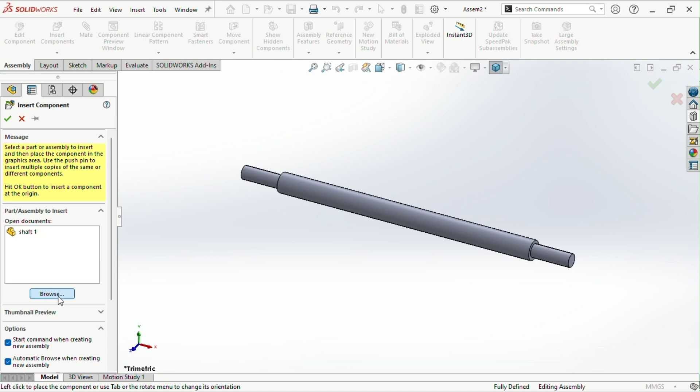Now we will add the tube, which is also known as the roller sleeve. So open it and place it.

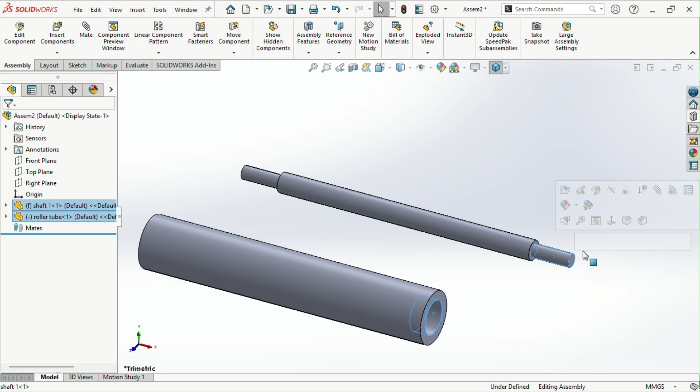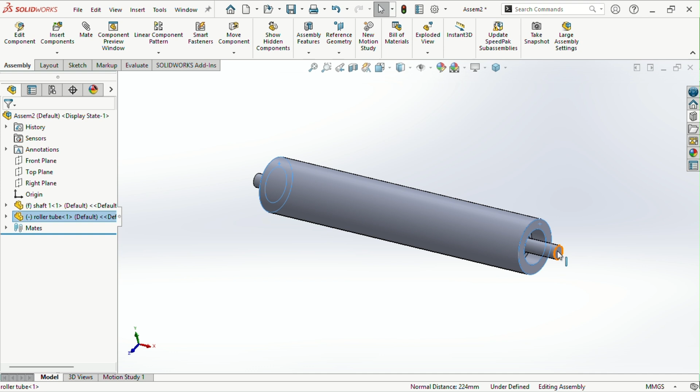Now we will add some constraints and mates. Give concentric. Now this sleeve is moving, so we have to place another mate to assure that our sleeve is at the center of the shaft. We will select both faces of the sleeve and both faces of the shaft, using the control key to select. Here we can see the width mate appear, so click on it and click OK.

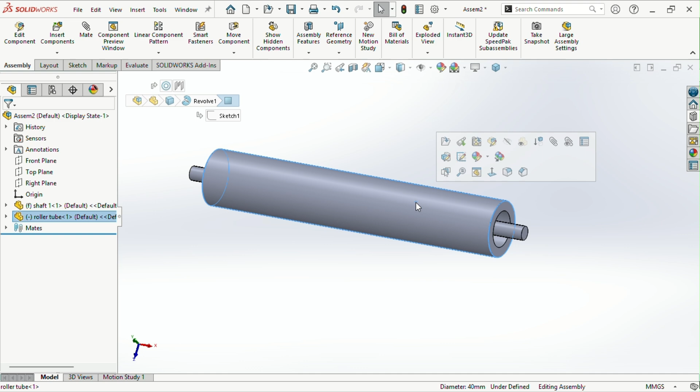Now we can see our sleeve and shaft are constrained. I think we should use some color so that we can easily identify the sleeve and the shaft.

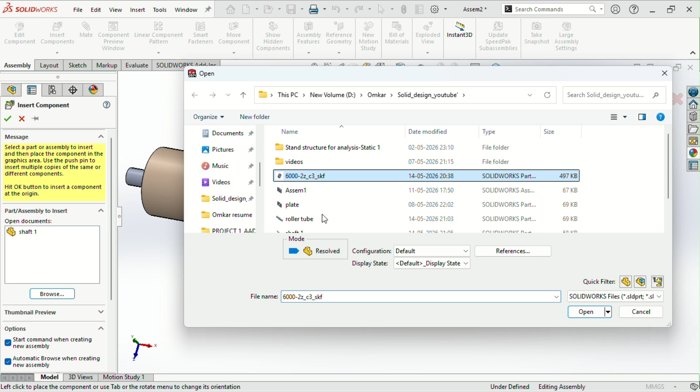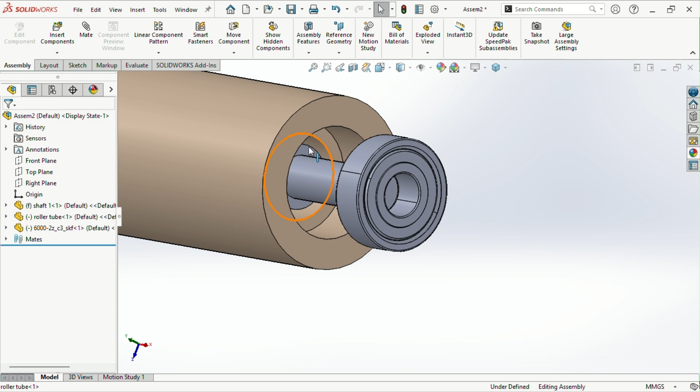Now I have already downloaded the SKF bearing, the 6000-2Z. We will add concentric and coincident mates.

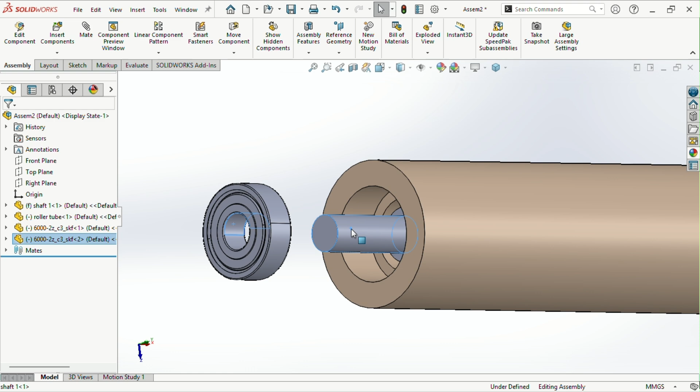For the other side also, copy the bearing using the control key. Just drag it and you can see we have a copy. Take concentric and coincident mates for it as well.

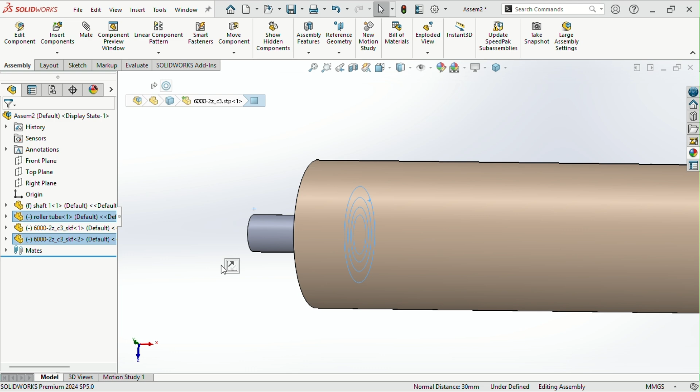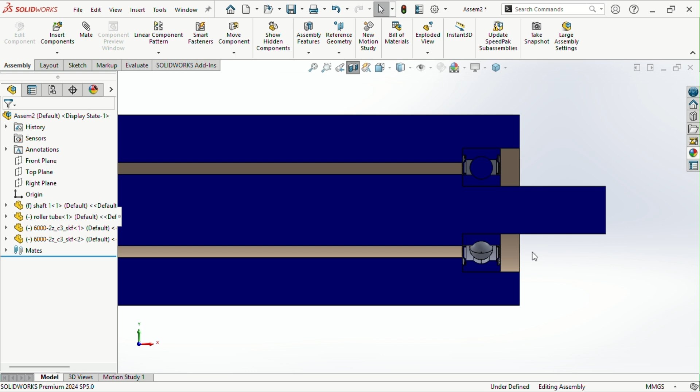Now we will take a section view so it will be easier to understand. We can see over here, this is our bearing, and the inner race of the bearing is resting on the shaft. The outer race of the bearing is resting on the sleeve side.

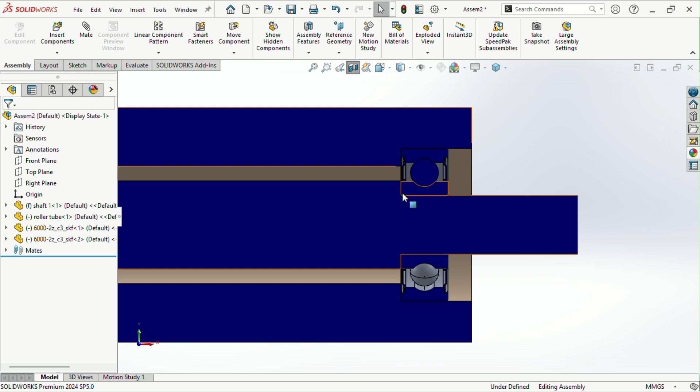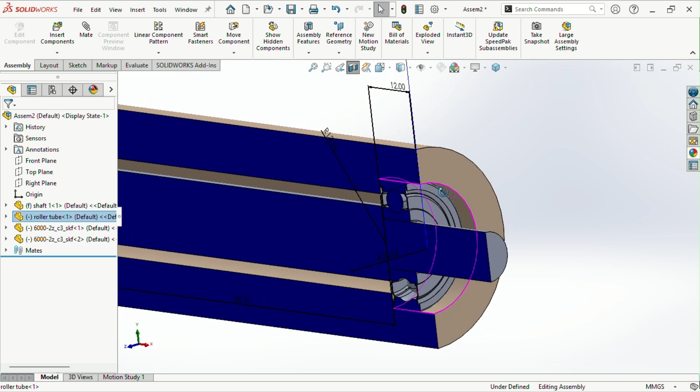I will just let you know I have changed the dimensions of the inner diameter of the roller tube and the step we created, as per the dimensions of this bearing's inner race, outer diameter of the bearing race, and outer diameter of this outer race. We can change the dimensions just by double clicking on it.

So keep in mind that we can change the dimensions directly from the assembly level. That's why I told you in the previous video we can have any dimensions if we don't know the exact ones. After assembling, you will come to know that a dimension is not appropriate, so we can change it.

Now I will tell you how I selected the bearing. This is the SKF website. Here we can go to the home page, Products, Rolling Bearings, Ball Bearings, Deep Groove Bearings, and here we can have the selection from the filter. We can have the bearing, I think, yeah, this is the filter.

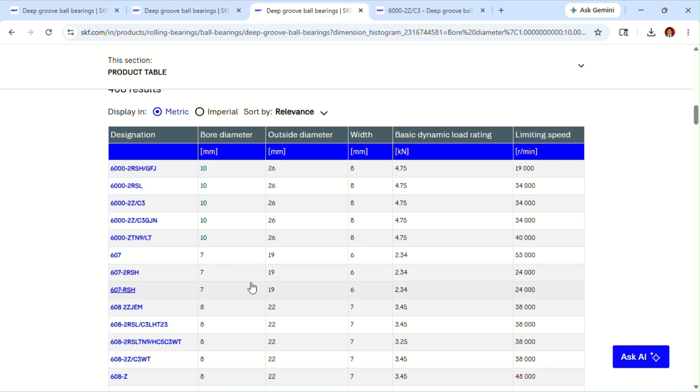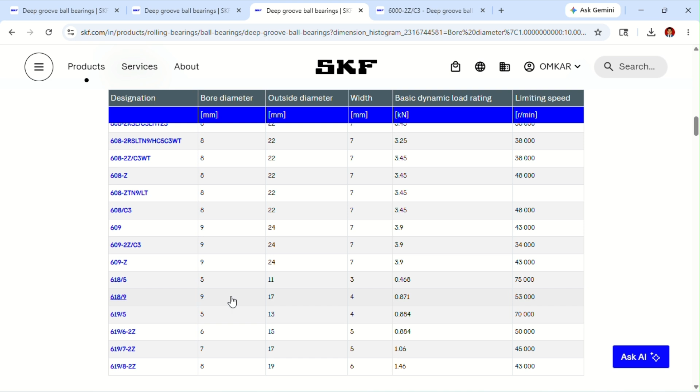I have just placed the 10 bore diameter which is required, and we have all the bearings with that. We have only 5 bearings with bore diameter 10, because we selected 1 to 10, that's why it's showing 7, 8, 6, 5, 9, and 10. So we have to select 10. I have selected the 6000-2Z/C3.

Here we can have the outer diameter at 26 and width is 8, and the basic dynamic load rating is 4.75 kilonewtons, so it's a good load rating. In the upcoming videos, we will have the calculation part, showing how we can select the diameters and thickness of the rollers in terms of the radial load on it and the UDL on it.

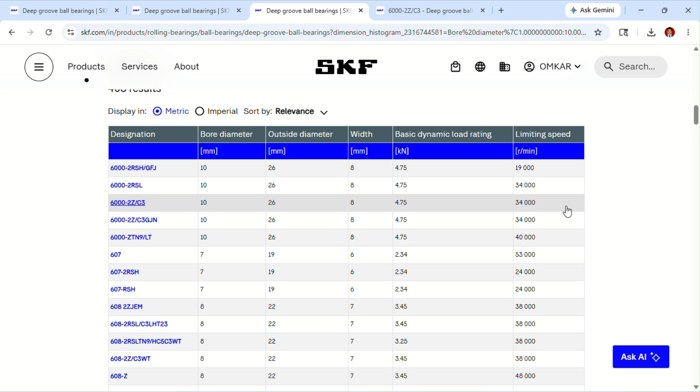So the limiting speed is 34,000 revolutions per minute, meaning the RPM of the bearing is limited to 34,000. That's why we selected this bearing, and we can download this CAD model from here. We have to select the format — I selected step AP203 — and just download it.

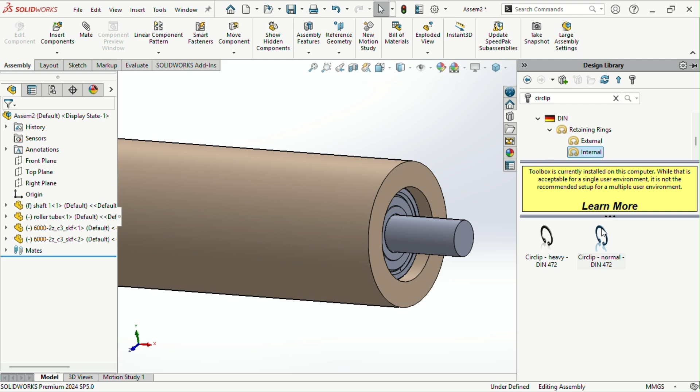Now we have to lock this bearing. For that, I will add the circlip — take a normal circlip, a heavy circlip is not needed. The outer diameter of the bearing was 26, so I will keep it at 26.

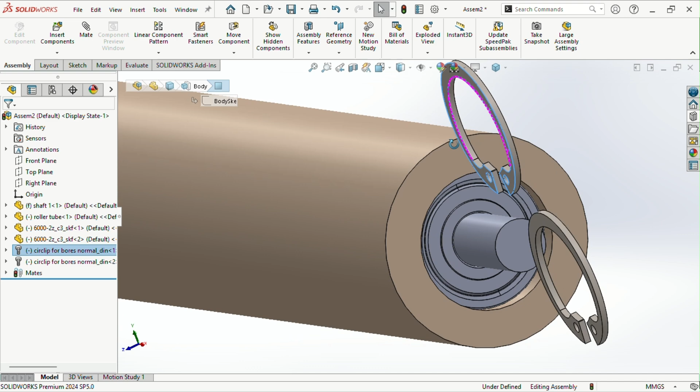Now, okay, let's take a 2. Click on escape. Now we have to make some groove here to place this circlip in it. So for that, we have to know the thickness of the circlip is 1.2 mm. So we should have at least 1.3 or 1.4 mm of groove on it. So we can directly add this sketch into the previous sketch.

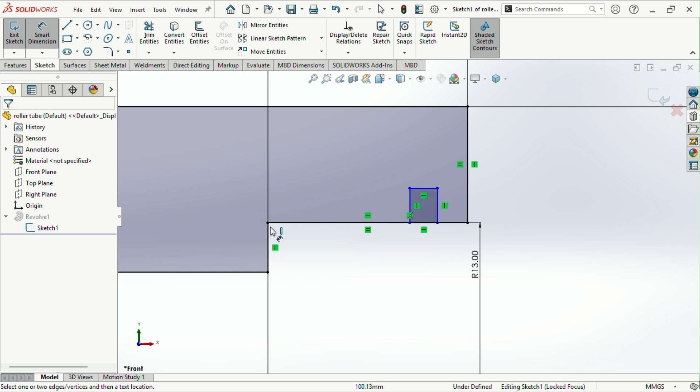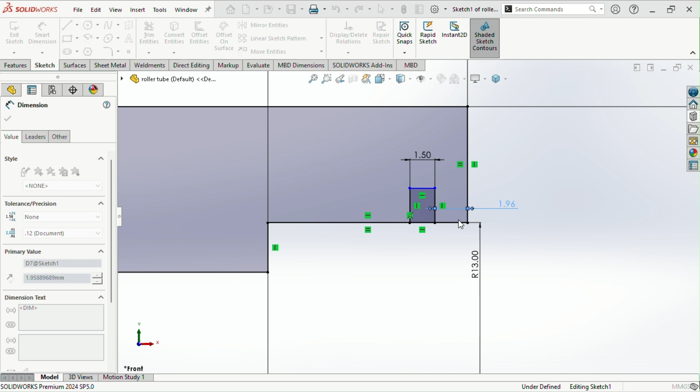As you can see, I will add one rectangular line. We can have both. Yeah. So now friends, we know the 8 mm of width of our bearing is from this. Now we have to take the groove dimension as, let's say, 1.5. We'll take 0.3 mm plus of the circlip size, and from this end we will keep, let's say, 2 mm. So 1.5 and 2 is 3.5. Total is 12.

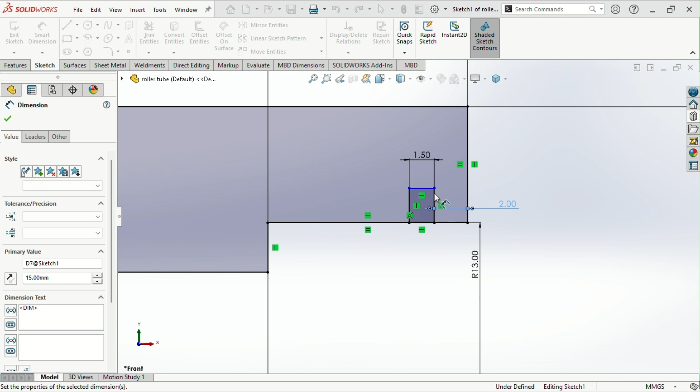Okay, now to select this size, we have to consider the design data book. In that, we have the dimension and the groove size, what the outer diameter of the groove should be, and the inner, the thickness. So we will just keep this as, let's say, 2 mm.

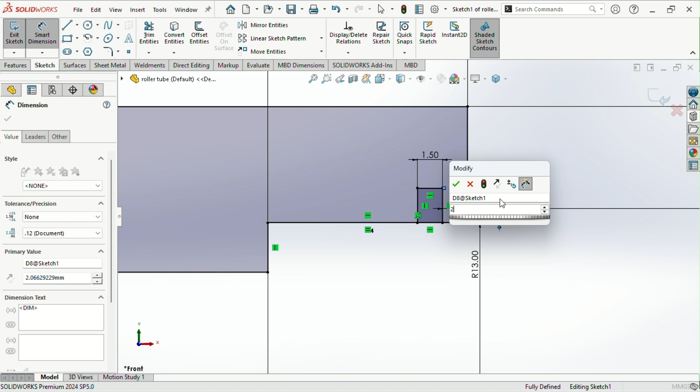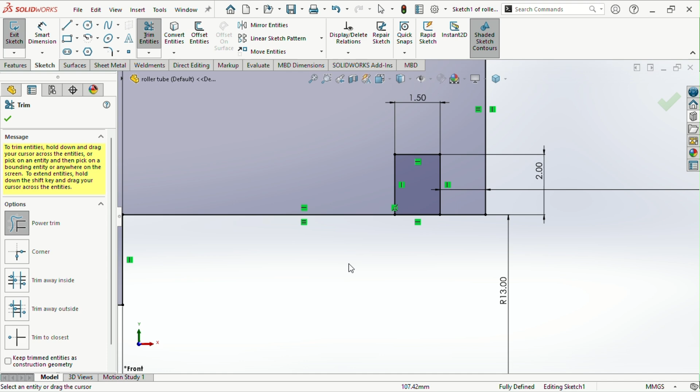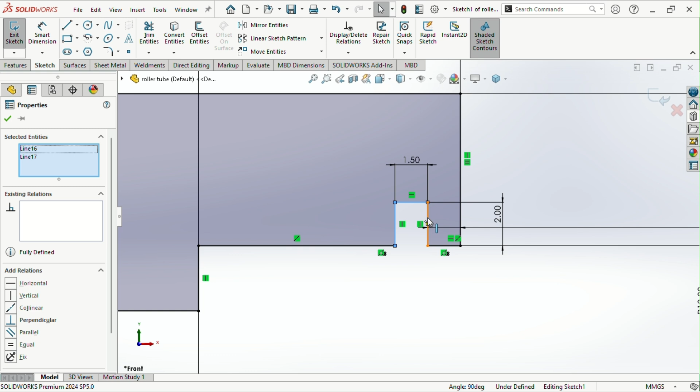Okay, now we have to trim this line, because this is a revolve feature, so all the edges should be closed. No overlapping is allowed in this. So take a trim and just drag to this, so we can see this is now in the shaded form. Okay, now we can have the mirror. So let's take a center line so that we can have the mirror feature. Just select whatever you have to mirror. So I have to mirror these three lines. Okay, go to the mirror entities and mirror about this center line.

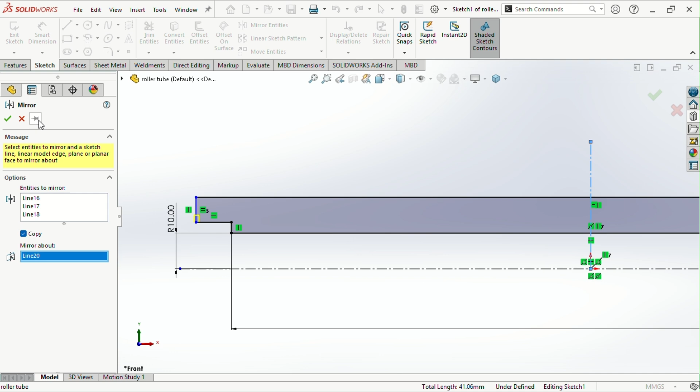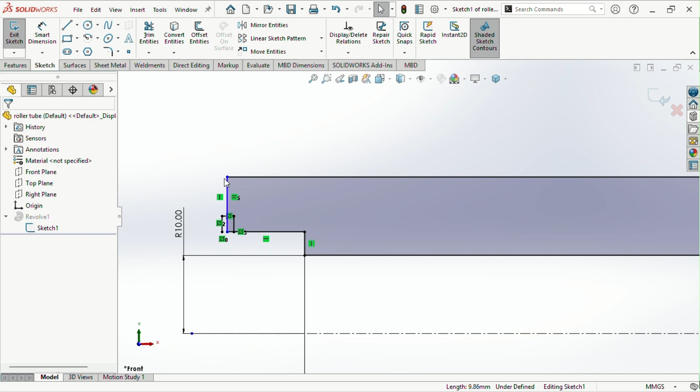Okay, there is one dimension. I will click on OK. Here our constraint is, I think, deleted. Yeah, because we have trimmed this. So I will just add one constraint. Okay, it's 12 mm. So I will add the dimension. It's 12 mm.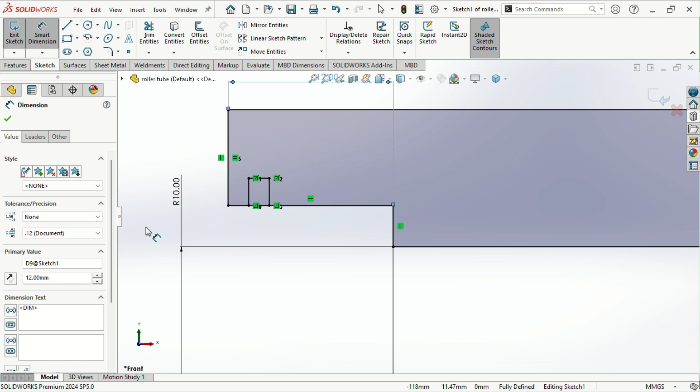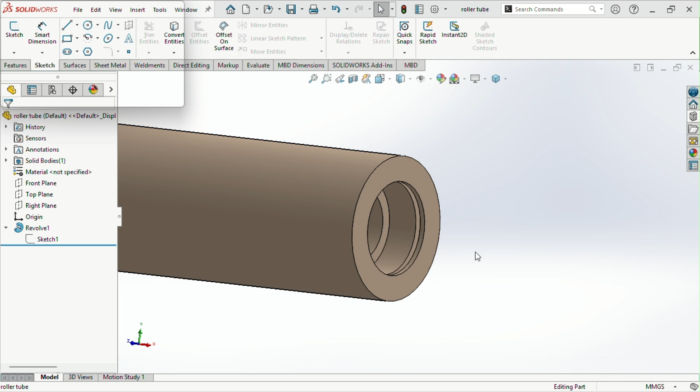Okay, now we have to trim. So go to the trim and just drag it. Now click on OK, exit the sketch. Now we can see there is one groove here to add our circlip. Save this and go to the assembly. Yeah, here we have to provide some mates. So we will add the coincident mate first, and then concentric mate.

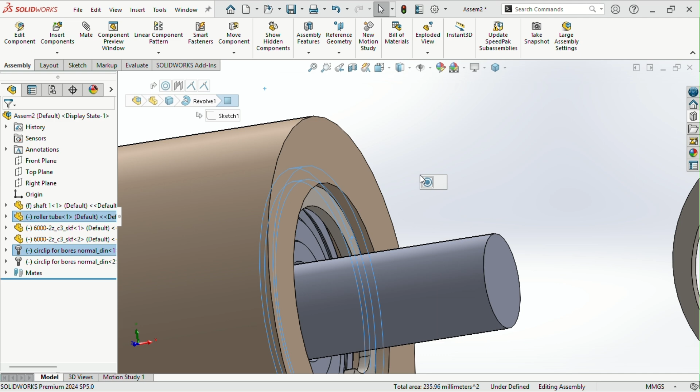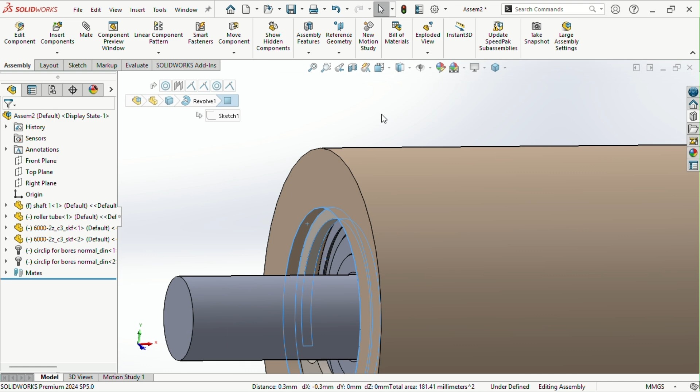System is in a hanging mode. Okay, so our circlip is now at the perfect side. So on the other side also we will keep the coincident at this face. And the concentric mate we can have on any faces of this roller tube. Okay, now it's fit and fine. Now we will take the section view so that we get a clear idea.

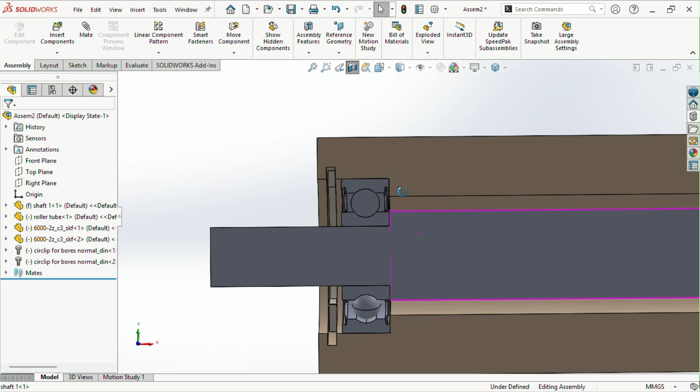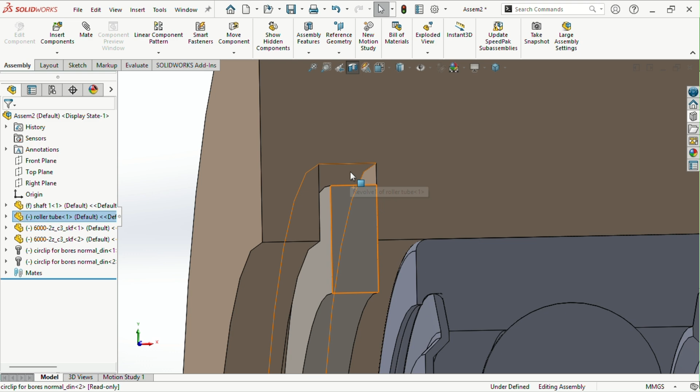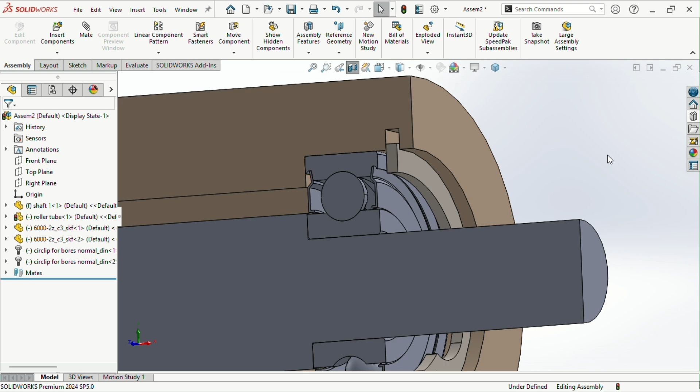Okay, so I don't want this blue line. Yeah, now you can see our outer diameter is wrong. That's why there's the gap here. That's why I told you that this size is actually an ISO standard from the design data book. But I don't want to get too deeply into that. That's why I just kept this random. But you can check it and let me know what the outer diameter should be for this 26 mm inner circlip, so that we will have a better idea and you will also come to know.

So yes, that's it. We have made our first roller, and congratulations for that. And thank you for your concentration and patience.

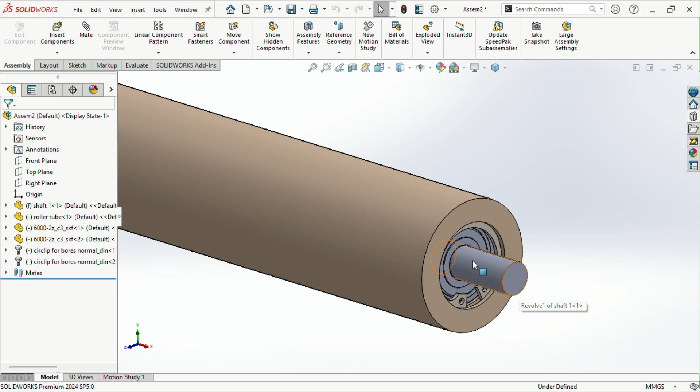So we will see in the next videos, like exploded view and other things like, yeah, I already know the run interference detection, I think. So in the next video, I think we should make one stand structure, since the major parts of the conveyor are the stand structure and the roller. So we have made the roller, so we will try to make a stand structure, and we will see how to fix this roller to the stand structure and how our conveyor is going to be perfect as per the industry requirements.